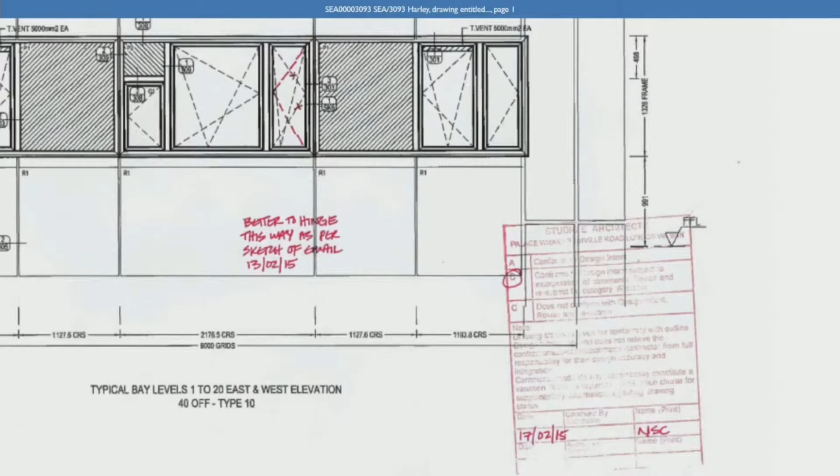Now, was it your understanding on the project that in these circumstances the drawings did have to be resubmitted after incorporation of Neil Crawford's comments? Sorry, can you reread the bit that is not clear? Yeah, you want me to reread the category B comment? Yes, please. Yeah, so what it says is conforms to design intent, subject to incorporation of comments, revise and resubmit for category A status.

Now, my question to you is, was it your understanding in these circumstances, so where it's marked category B, it's not A, it's not conforms to design intent, was it your understanding in those circumstances that the drawing should be resubmitted to the architect after incorporating the comments they'd made? Trying to look back on it, I have no memory of any conclusions I would have drawn on this. So you can't help us as to whether it routinely happened on the project that the drawings would be resubmitted to get the category A status? No, I can't help you on that.

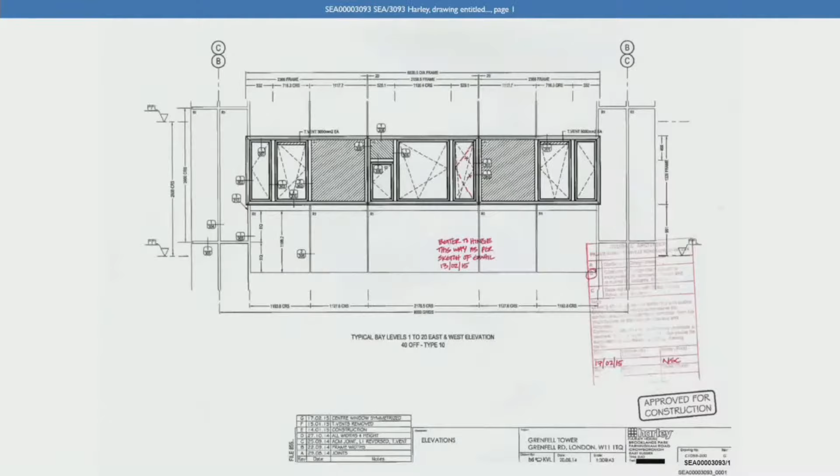Now, also on this drawing, we can see a printed stamp on the bottom right of the drawing. If we zoom out again, can you see there someone's put approved for construction on the bottom? There's a stamp there. Do you see that? Yes. Now, do you know who applied that stamp, or who would have applied that stamp to this drawing? I don't know who did it.

No, it appears, just be a guess. It appears to us to be, this is a Harley drawing, and it appears that Harley had stamped it approved for construction before it had been reviewed by Neil Crawford and his stamp. I mean, there's a lot of revisions there. I mean, how would you know he hadn't checked it at one of those previous revisions?

Right, well, I think we've tried to check, and we're not aware that this drawing did get category A status prior to this. Were you aware on other drawings of these drawings being approved for construction with that kind of stamp before they'd been sent to Studio E, or indeed Rydon? No, I wasn't aware.

Whose role would you have thought it was to apply that approved for construction stamp on the project? It would be the designer's role to put that on, their interpretation of that statement next to the B. So would you expect Mr. Lamb to be applying that approved for construction stamp after they've got a category A from the architect?

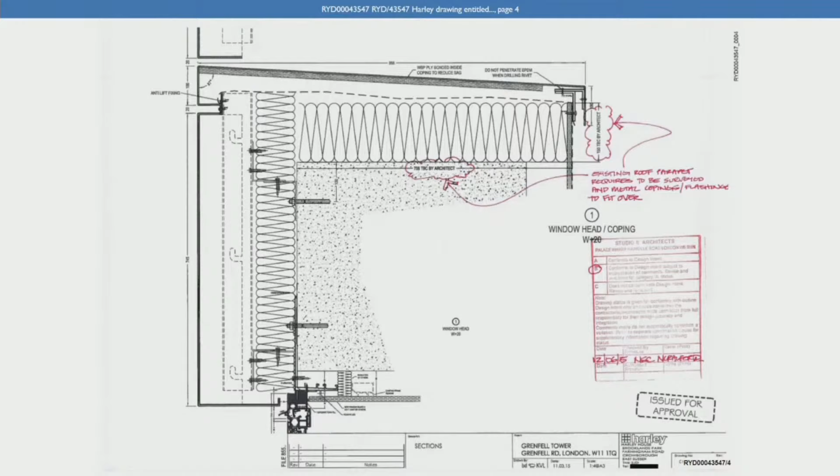RYD, yeah. And I want to look at page 4. We can see that Neil Crawford has stamped the drawing status B and annotated the drawing regarding metal copings and flashing at the roof parapet. Do you see that there? There's the red comment and the bubbles. Yes. It says, existing roof parapet requires to be surveyed and metal copings flashing to fit over. Do you see that there?

Yes. And he's marked it status B again. Do you see that there? Yes, it's clearly B, not A.

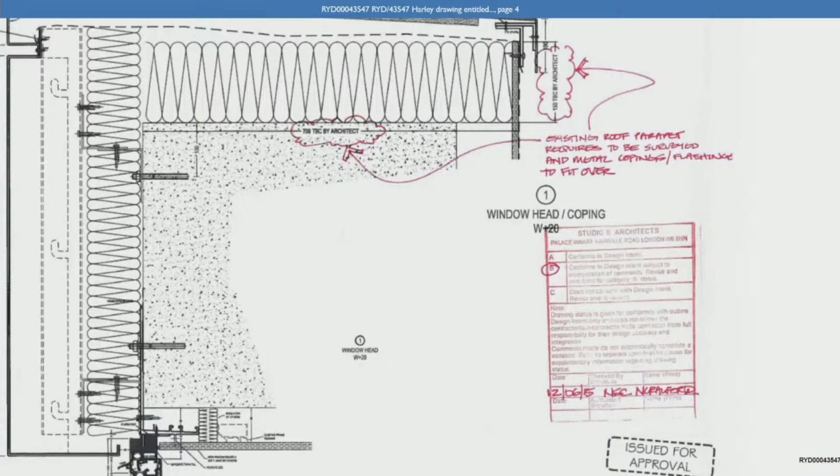And if we can now turn to SEA 3013262, we can see from the bottom email that Mr. Lamb then sends another email to Simon Lawrence, copying you and others in, on the 1st of July 2015. And he says, Neil, please find attached revised coping detail to the crown element. Do you see that there? Yep. And he says, if you could have a quick look and pass your comments, we should then reissue the whole of this element for construction based on your previous approvals.

Yes. And he makes another comment about the shorter coping in the last line. And then if we go up, we can see that Mr. Lamb's actually sent it initially to the wrong Neil and then sends it to the right Neil. And then Neil Crawford at the top of that page responds on the 1st of July. Hi, Kevin, please see attached, regards, Neil. Do you see that there? And attaches another drawing.

If we can look at that, that's at SEA 30013263. So that, we think, that's the same drawing, and this time we've got status A, window head coping, conforms to design intent. Do you see that there? Yes, in the Studio E stamp.

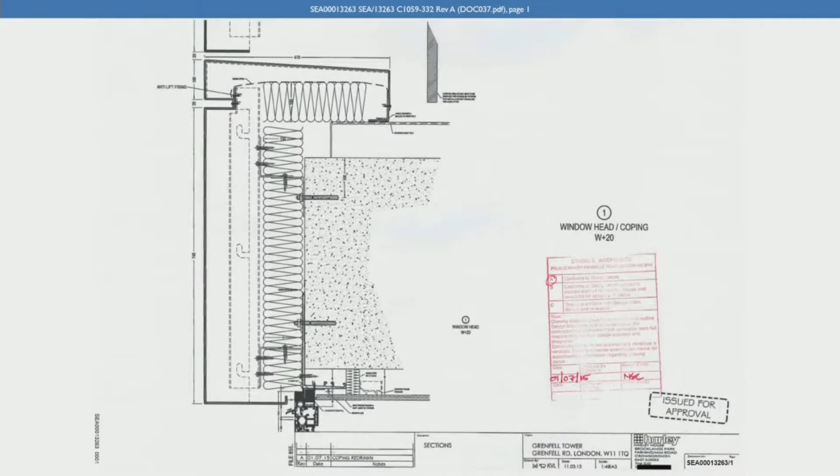And if we keep following the story of this same drawing, can we now turn to HAR 404443, HAR 40443, and if we look at this, this is from Kevin Lamb to Simon Lawrence, copying in others. But again, it's addressed to Neil. And he says, main entrance adjusted as per your further comments this morning, cladding drawing just with additional set out info for the installers. Do you see that there? Yes.

So it would appear that Neil Crawford makes some additional comments on the drawing, and then Neil Crawford writes to Kevin Lamb, no further comments as attached.

If we go to that attachment, SEA 403310 at page 3, we can see that this is now revision B of the drawing, which was amended on the 26th of August 2015. We can see that at the bottom.

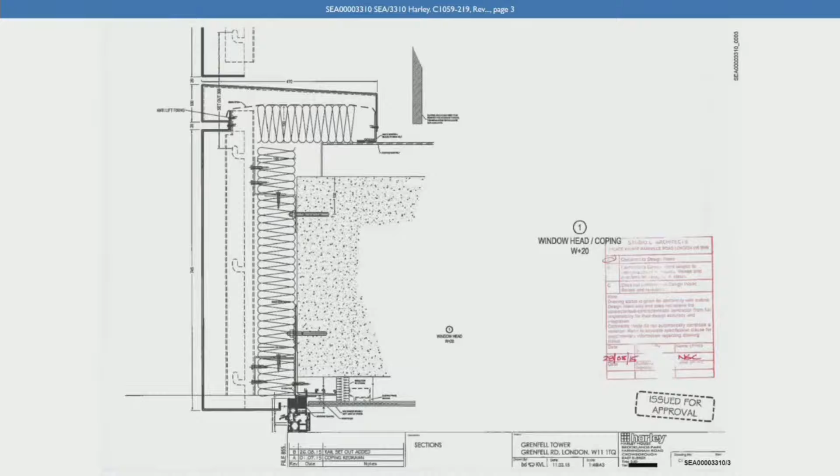Do you see that there? Yeah, at the start of this chain it was talking about the crown. Yeah, and then this last email it was talking about the main entrance. Yes, but then it's back to this again. This appears to be the drawing that's attached, we think, by Neil Crawford, and it's marked status A.

What I wanted to ask you is, in that example, it appeared to be Neil Crawford responding saying hi Kevin, no further comments as attached, whereas before it was sent to Simon Lawrence. Again, my question is, can you help us as to which was more representative of the typical approach to drawings? Was it Simon Lawrence or Neil Crawford who ultimately approved the drawings for construction?

I wasn't working closely enough to it to be able to say definitely, but it was always my impression that it was the architect who was approving drawings.

Can we look now at HAR 404590? This is an email of the 20th of October 2015 from Kevin Lamb to Simon Lawrence, copying you and others in, and there's a large number of drawings there. And he writes, Neil, so he's addressing it again to Neil Crawford: please find attached GF curtain wall elements for comment approval.

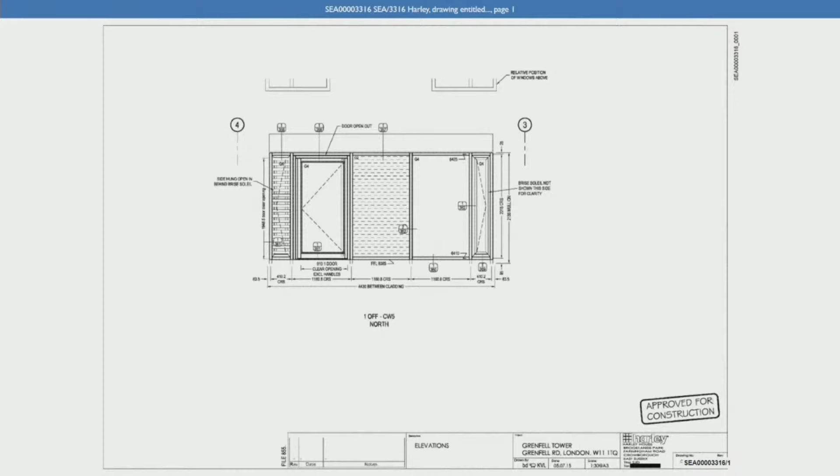Now we can see clearly here that this hasn't got a Studio E stamp, so it's not yet been reviewed by Mr. Crawford, but we can see in the bottom right-hand corner that it's said to be approved for construction. Do you see that there? Yes. Can you help us as to why this drawing would be said to be approved for construction when it hasn't yet been considered by the architect? No, I wouldn't.

Mr. Crawford then replies to the email. If we turn to HAR 404669, we have Mr. Crawford, 22nd of October 2015, saying, hi Kevin, please see attached comments on ground floor.

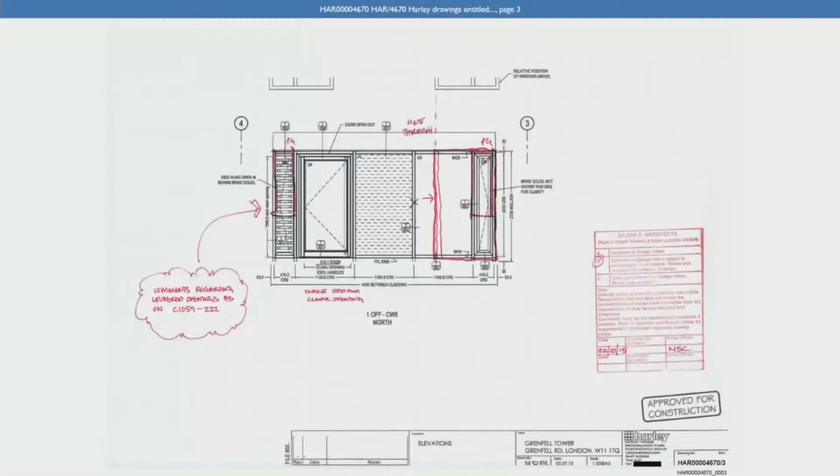And then if we turn to the attachments and the drawing that we were looking at, which is the C1059223 drawing, if we go to HAR 404670 at page 3, here we can see that Mr. Crawford has made a number of comments to the drawing and stamped it status B. Do you see that there? Yes.

Now, following this drawing through, Mr. Lamb then responds to Mr. Crawford's email. This is HAR 404743. So this is Kevin Lamb to Neil Crawford at Studio E, 26th of November 2015. And he copies a number of people at Harley, including you, but Mr. Lawrence, so Simon Lawrence, isn't copied into this email or sent this email. And he says, Neil, please find attached GF curtain wall drawings revised in accordance with your comments. Do you see that there? Yes.

And in the attachments, that same drawing, C1059 GA model 51223A is there, and that's revision A of the drawing. And if we can turn now to HAR 401999.

This is an email on the same date, the 26th of November 2015, from Ben Bailey to Mike and Lucy at AGF, their Aluminium Glass Facades Limited. I think they're a fabricator, is that right? I don't know, to be honest. And Ben Bailey writes, please see our construction issue drawings attached for Grenfell Tower.

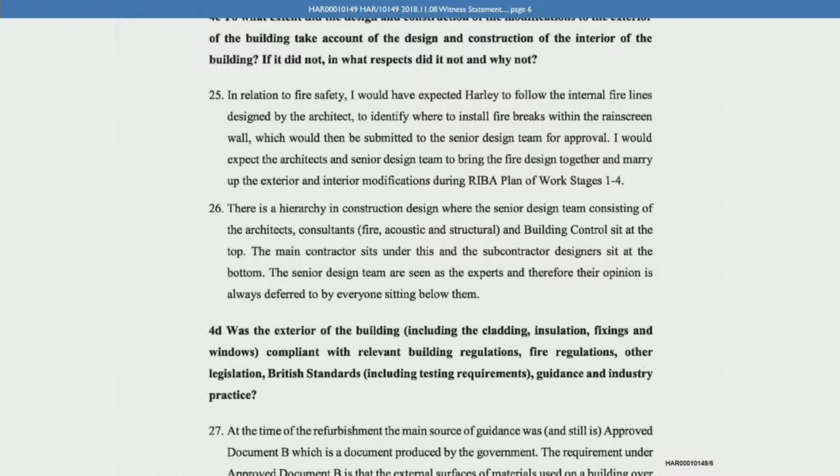HAR, sorry, yeah, thank you. So if we can read what you say there, you say there is a hierarchy in construction design where the senior design team, consisting of the architects, consultants, fire, acoustic and structural, and building control, sit at the top. The main contractor sits under this, and the subcontractor designers sit at the bottom. The senior design team are seen as the experts, and therefore their opinion is always deferred to by everyone sitting below them. Do you see that there? Yes.

Now, would you agree that Harley had a responsibility to consider the viability of the design regardless of any perceived hierarchy? I think Harley could only comment on and perceive the viability of the design on the areas that they were expected to be experts in, which was the fabrication and installation parts. That's where their expertise lay.

Points such as performances were not, certainly at that time without a technical manager, where their expertise lay. Do you agree in terms of fire performance that Harley could reasonably be expected to provide design input on a project like Grenfell? I don't see how they could without that expertise.

Do you accept that when it came to specialist design input in relation to the facade, Harley were not sitting at the bottom of the hierarchy? That when it came to the facade as specialists, Harley were actually higher up that hierarchy than you portrayed in that paragraph? Only on the points of installation and fabrication.

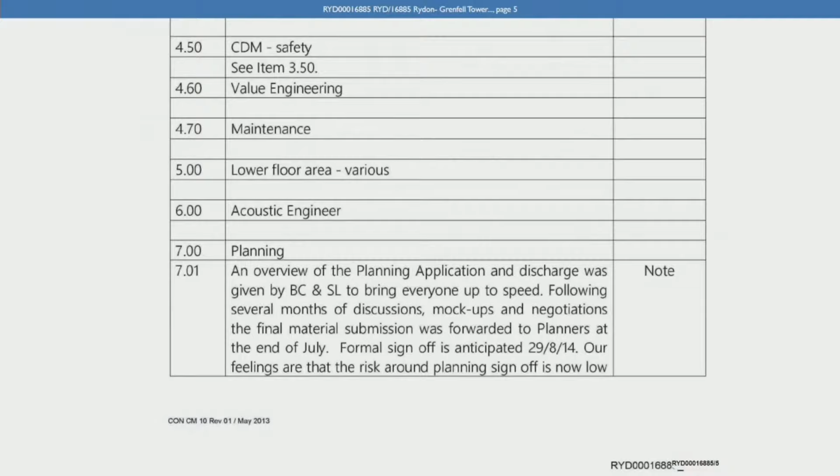Following several months of discussions, mock-ups and negotiations, the final material submission was forwarded to planners at the end of July. Formal sign-off is anticipated 29th of August 2014. Our feelings are that the risk around planning sign-off is now low, as the design to date is now in line with the planner's requests.

SL confirmed that we are to proceed design based on the following criteria: champagne-coloured cladding panels for the main part of the building. Do you see that there? Yes. Rain screen cladding to be cassette, hidden fixing type. And then he goes on about other aspects of it.

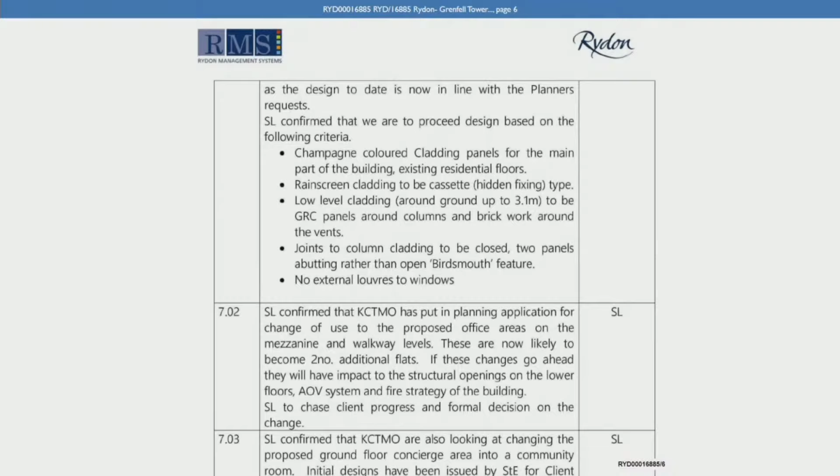Was it your understanding by this point - I think this is the first design team meeting and you're there - that the decision had been taken to use the Reynobond rain screen cladding panels? Yes.

Did you understand at the time that the product was formed of two thin sheets of aluminium with a low-density polyethylene PE core? Did you understand that at the time? I understood that it had a core, but I didn't understand what it was.

Can you explain why you weren't interested in the core? Why was that not something you wanted to know as the design manager for this project - what was in the core of the main rain screen panels? I think for this project I was only responsible for making sure that Kevin got started and then to make sure he got on according to programme. In respect of other projects, I would usually submit all that information to building control and the architect to get signed off.

But can I just ask, from a structural point of view, you'd need to know the weight of the panels, wouldn't you? Yeah. And therefore possibly their composition. That's usually specified as an overall weight per metre squared.

Now, I've asked you a little bit about your knowledge of other cladding fires, and I think you've said you didn't have much knowledge at the time of cladding fires, whether domestic or international. Is that correct? That's correct. So were you not aware at this time that there had been cladding fires abroad on buildings containing polyethylene PE core panels? No. You weren't aware of that?